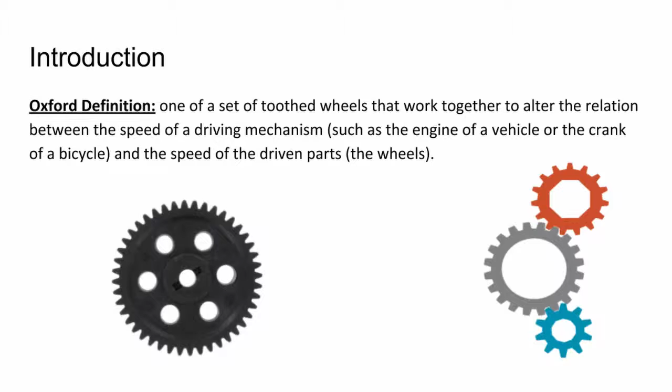The first recorded usage of a gear was in 27th century BC China, where a gear would counteract the rotation of the wheels of a chariot to maintain a direction set by a pointer compass on top. This allowed them to keep a direction, preferably south for them, without the use of magnets and a normal compass.

Centuries later, the Greek philosopher Aristotle gave the first academic description of a gear, as a device that would reverse the direction of rotation of another gear wheel. The ancient Greeks went on to use the gear to build clocks and water wheels, devices allowing them to transfer mechanical energy from rivers to other devices such as mills.

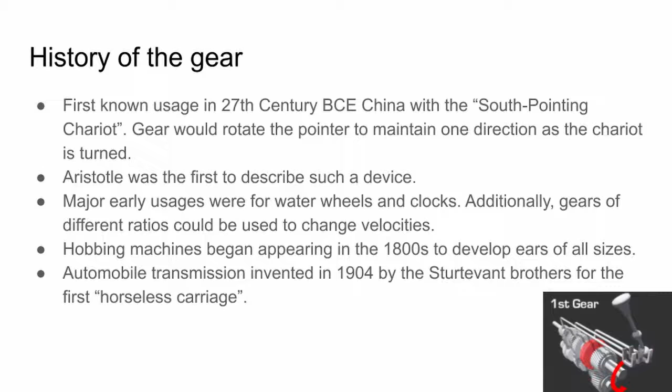The most important discovery about gears is that different combinations could be used to generate different amounts of power, such as the transmission of an automobile or the gear changer on a bicycle.

Over the years, many different situations have called for the use of many different materials in the manufacturing process of gears. The material used directly relates to whatever the largest concern is, whether that be the durability, strength, or cost.

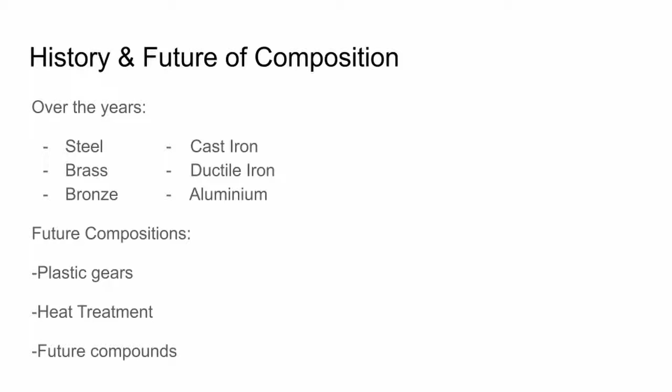Future compositions of gears might include stronger polymers, polymers mixed with metal gears. Heat treatments are also an option as well. You take current existing materials for gears and you put them under heat treatment. That improves the state of the gear with strength and torsion. Also, future compounds might be discovered, like new metal alloys or ceramics that offer a higher quality of steel gear.

To begin, there are many core necessities for gear material. They must be made of high tensile strength, high endurance, low friction coefficient, and have the ability to be manufactured. There are an endless amount of possibilities to create gears, including brass, bronze, plastic, and cast iron, but we chose to focus on steel for its many applications in today's day and age.

Some day-to-day objects include parts of a car, dishwasher, elevators, cutlery, and nearly any stainless steel object. Stainless steel is an alloy of steel that is ideal for food production, storage, and sterilization. It's corrosion resistant, which is crucial to long-term use and even aesthetics.

The history of steel can be traced back 4,000 years to the beginning of the Iron Age, when it replaced many tools and weaponry as opposed to the bronze that was traditionally used. In 1856, Henry Bessemer produced an efficient manufacturing process to reduce the carbon content in iron. In the 1860s, German engineer Karl Siemens further enhanced steel production with the open hearth process.

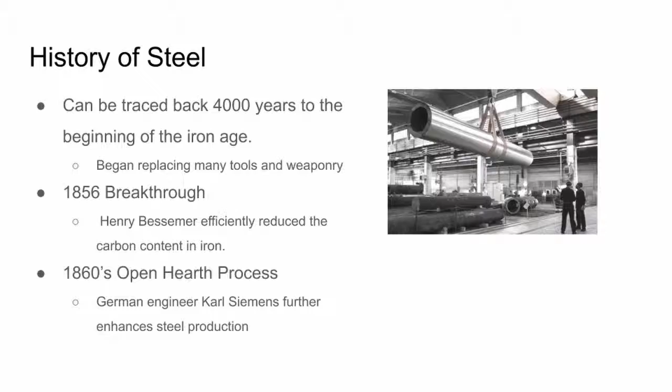There are three main steps in the method of production of steel. The first part is getting the iron from iron making. Iron is a huge component in all steel compounds. The second step is when you actually make the steel. This is when you take your compounds, whatever percentage of materials you have in the steel, are compressed into its element of actual steel. And then the third element is whatever you need it for.

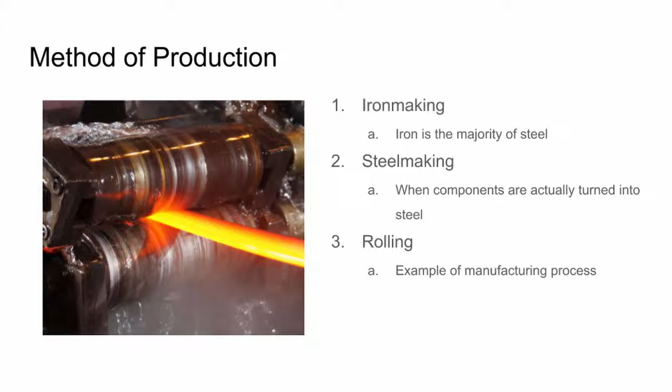An example of it is rolling. This is when you roll steel into flat sheets, and it's easy to ship and has a lot of applications. The applications of steel can be divided into several sectors: construction, transport, means of energy, packing, appliances, and industry.

One of the most notable usages of steel is the previously mentioned alloy, stainless steel. Stainless steel is used in the medical industry such as surgical supplies, instruments for sterilization, surgical implants, and those are just to name a few.

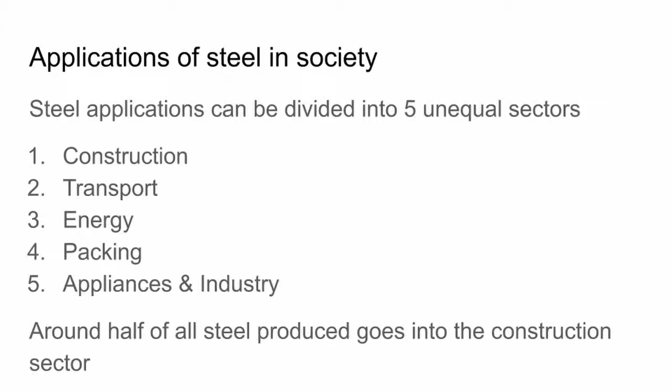In terms of construction, sustainable steel structures can be quickly built at a low pricing and be reformed to match criteria for applications. Around half of all steel produced goes into the construction sector.

Steel has had a massive commercial impact in the United States. In the United States, the iron and steel industry generates about $520 billion in the U.S. economy, as steel is one of the most used materials in the world. The industry also generates over 2 million jobs, making up a large 1.5% of the job market.

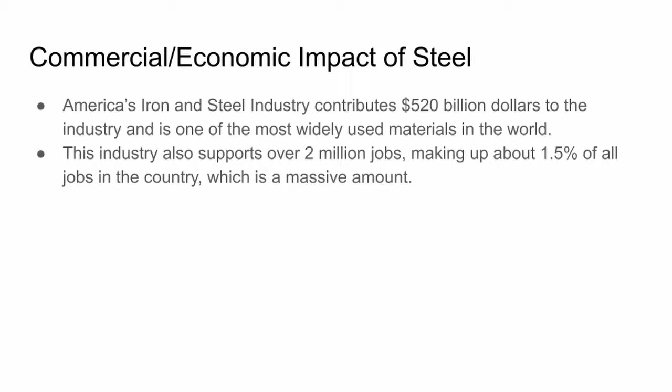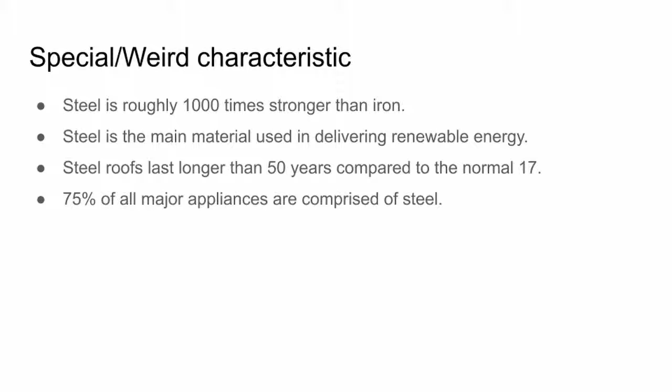There are many special and interesting characteristics to steel, one of which is that it is roughly 1,000 times stronger than iron. Steel is also the material used in delivering renewable energy. Steel roofs last longer than 50 years compared to the normal 17 years of most other roofing materials, and 75% of all major appliances are comprised of steel in some way.